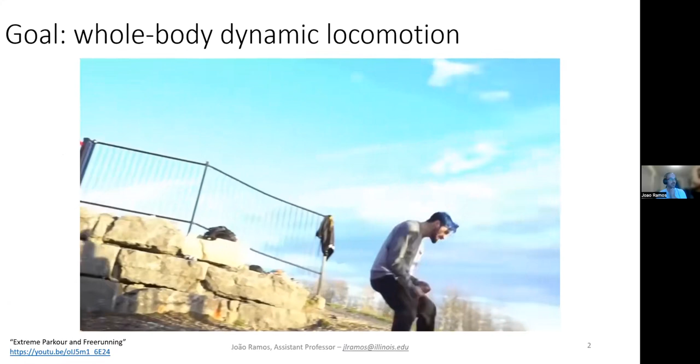Starting at a high level, what I want to achieve is probably what every roboticist wants: robots that are really able to perform dynamic motions at a human level. What I want is for the robot to exploit dynamics and maneuver through an environment in a very dynamic way, like what we see in parkour and free running. The difference is that I don't want to achieve this through complete autonomy on the robot side.

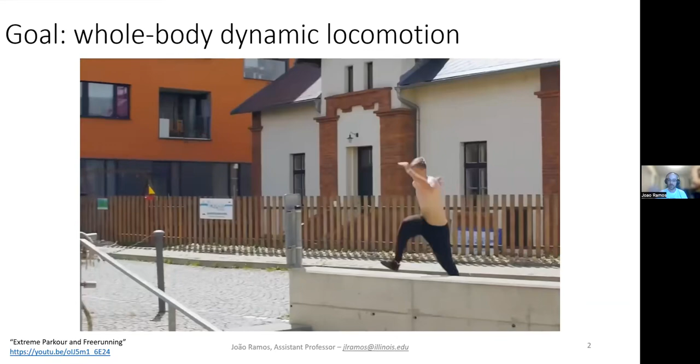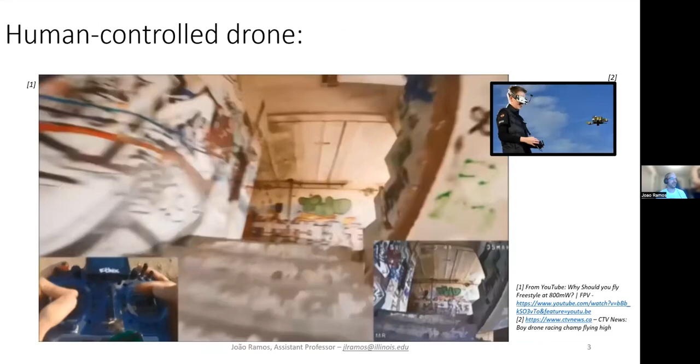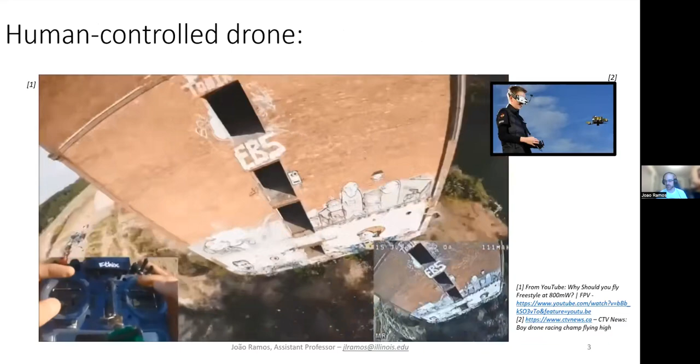What I'm trying to do is achieve this through human control. I would argue that humans are extremely good at controlling things. For example, this is a video of a pilot flying this drone through a very cluttered environment, and I would argue that this performance rivals or surpasses a lot of what autonomous drones can do. Humans have a really good sense of anticipation and maneuverability, and they can build these motor skills. By the way, I love this part, it's really cool.

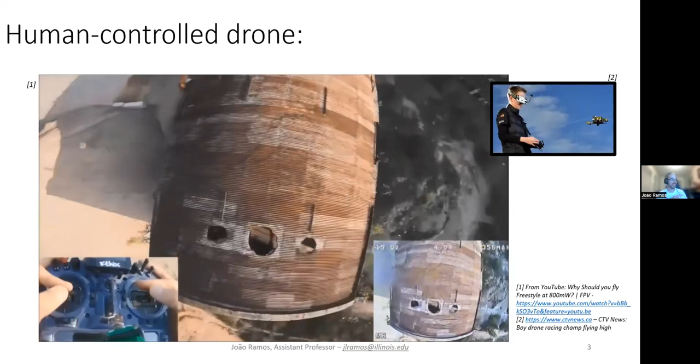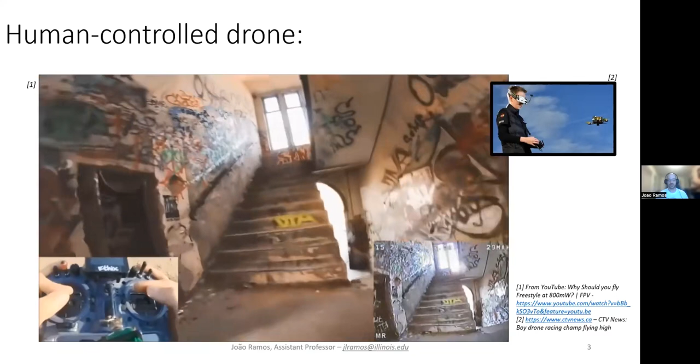So what I'm trying to do is achieve this parkour-level locomotion of robots through human control instead of complete autonomy. The difference, though, is that flying a drone versus maneuvering your body throughout the environment in a terrestrial way is a completely different thing. When you're jumping and running around, you're trying to leverage your contact forces in the environment in order to translate your center of mass.

So you've got to coordinate your whole body, climb and interact with the environment, do fast motions, contact the world with multiple parts of your body, and mitigate impacts. Pretty much what we need is a robot that has human-level adaptation to the environment. I think we're missing a chance to leverage this human innate ability to control their bodies if we're not using it to control humanoid robots as well.

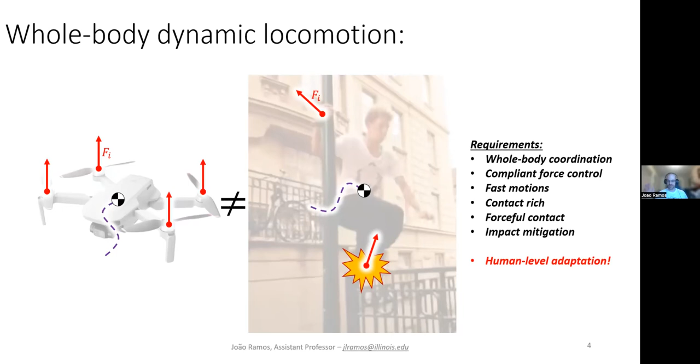So the overarching goal of my lab, the RoboDesign Lab at UIUC, is to accomplish this. The research in my lab is divided into three main topics. The first is something I call controls-aware design: how do you think about the design of these robots, knowing they need to facilitate control, be more efficient, faster, have better inertia distribution, and so on? How do you design when targeting facilitation of controls?

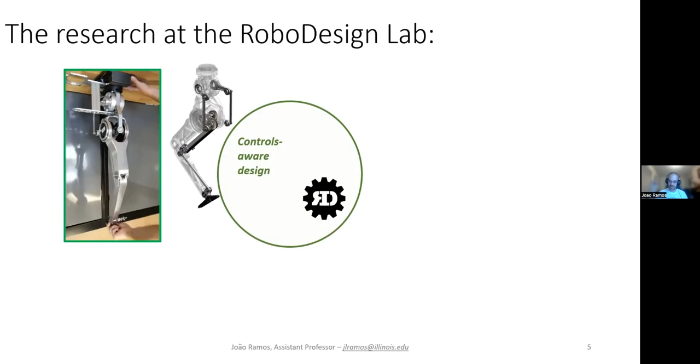The second thing we do is what I call human-centered control. How do you create control architectures for these robots knowing that they're going to be, in the end, controlled by a person? How should the robot follow the person's motion?

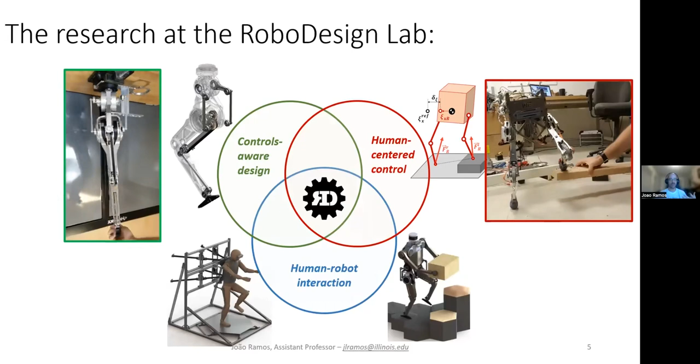How should the robot think about its own contact forces when it's trying to reproduce what the person is doing? And the third topic is putting the two together. So how do you think about human-robot interaction? How should the robot follow what the person is doing, but also provide feedback that enables the operator to understand what is happening, and be able to replan their motion and do a better job.

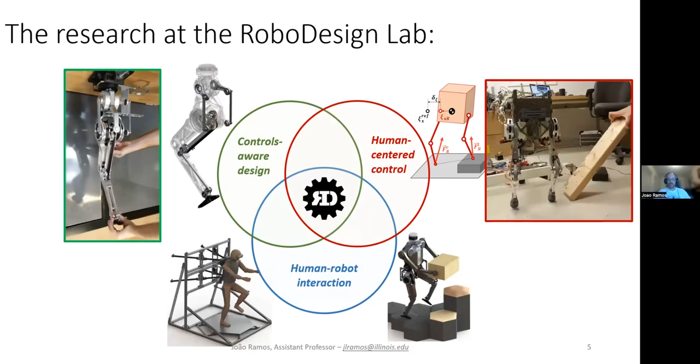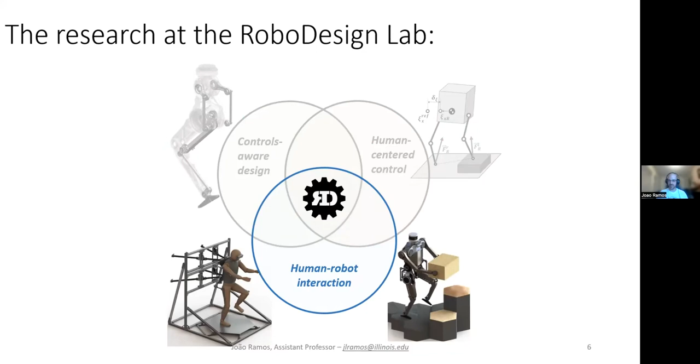I'll give a quick intro on some of the work we've done on human-robot interaction, to give some context to what I'm going to talk about in design. But a lot of what I'll focus on today is controls-aware design, which will be the second, longer half of this time.

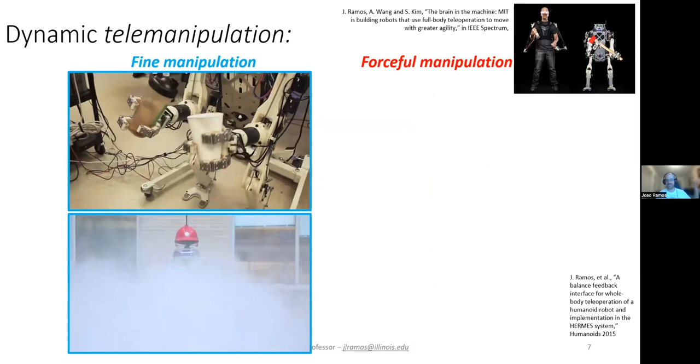My work on manipulation, telemanipulation and teleoperation began some time ago in my PhD. At the time we were doing kind of crazy things, like trying to put out this mock fire using a robot, doing what I call fine manipulations.

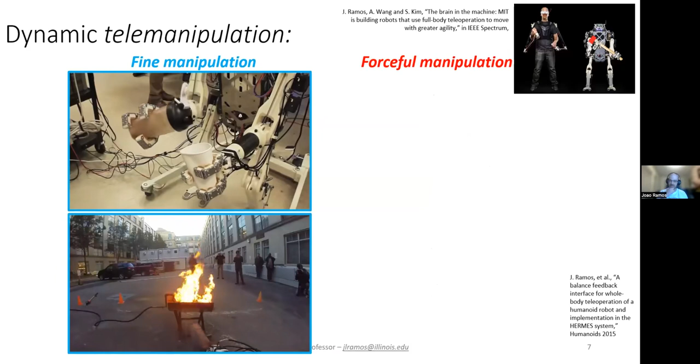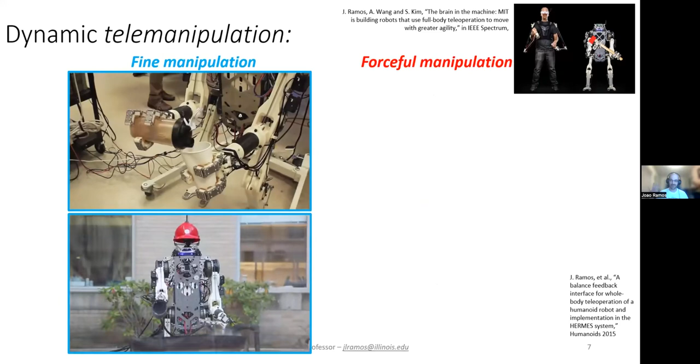What I'd like to point out is that these things were incredibly easy to do in teleoperation. We got it done the first day. It's probably something that would take a month of work to get the robot to do reliably. But at the time, we weren't looking at fine, slow, dexterous manipulation of things.

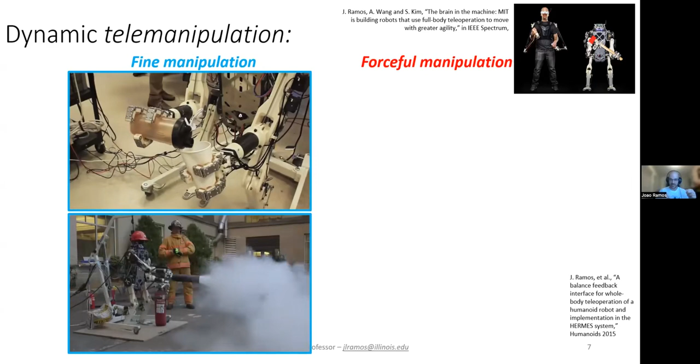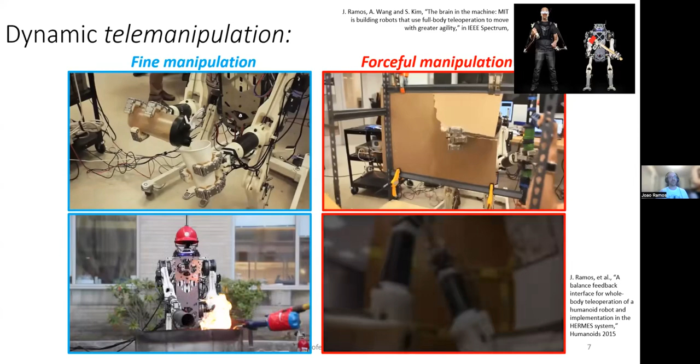What we wanted to do is what we call forceful manipulation. How do you teleoperate a robot to create large forces, impact the environment, deal with that impact, and also provide the person correct force feedback in order to better control the motion of the robot.

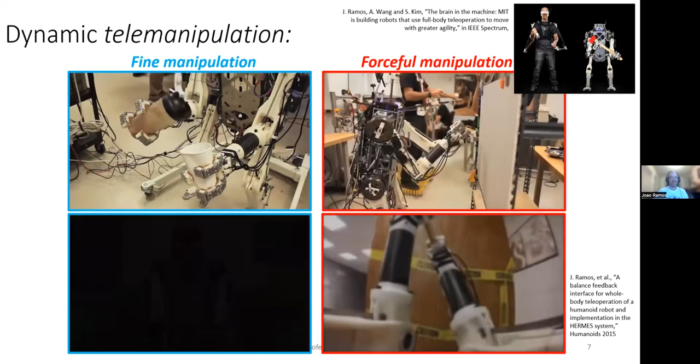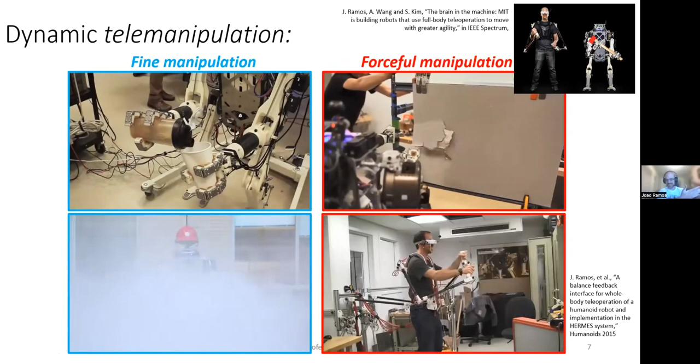And also, of course, if you build a motion capture system and a humanoid robot, I don't see anything better to do than trying to punch things and break walls and stuff like that. So there you go - but this was the very beginning.

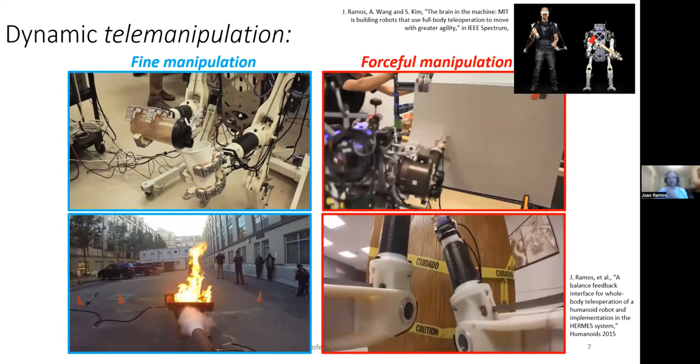At the time, honestly, we didn't know too much about what we were doing. We were just trying to explore what locomotion, what teleoperation would look like. So we went for manipulation.

The next thing I started looking at is what we call dynamic telelocomotion. At the time I was trying to figure out how to capture human motion and in real time convert that motion to a reference that is dynamically consistent for the robot to follow, getting the robot to follow that in real time.

This is probably one of my most important results from my postdoc and PhD. I was able to achieve dynamically stepping that was completely synchronous between the human and the robot. I want to give a shout out to biomechanics here, because a lot of my ideas come from dynamic similarity, and I brought that to robotics - it worked pretty well.

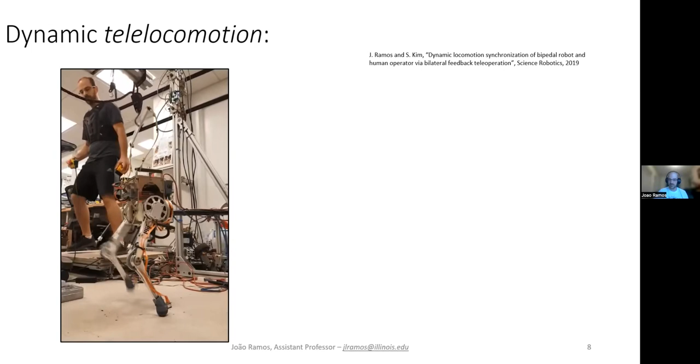At the time I was trying to really explore what we could accomplish with teleoperation of locomotion. So I also got to try these cute little jumps that we demonstrated here. All this is accomplished by simply scaling the forces that the person is trying to produce.

For example, here the operator is on this force plate, and pretty much what I do is capture the force that the person is applying. I tell the robot to apply a dynamically consistent force, and what results is that the robot takes off and jumps just like the person is doing.

What's nice is that we could also leverage a lot of results from autonomous robots as well. For example, if we embed some autonomy on the robot, it can also start to deal with obstacles that aren't present for the person. In the end, if the robot can still perform the motion, the person doesn't need to feel any feedback of what's happening to the robot.

I won't get into all the details of all these things - I just want to talk at a high level about what's happening.

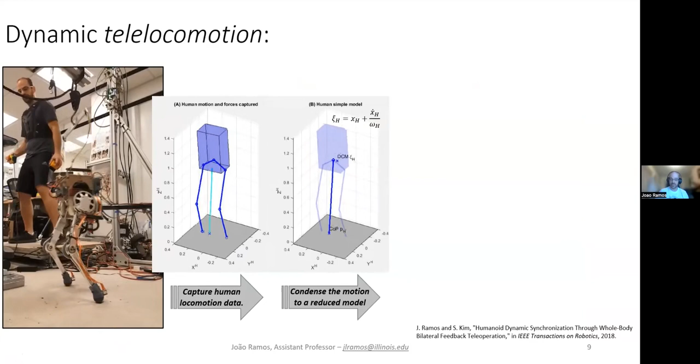We transfer that using dynamic similarity to the robot, so we can scale that motion to the robot. The autonomous controller just needs to figure out how the forces applied on the ground reproduce that reduced order dynamics. In the end, what we want is that the two reduced models, for the person and the robot, the LIP, the linear inverted pendulum, are dynamically similar.

There's a lot more detail that goes into this, but this is the gist of it. If you can use this reduced model as a way to scale the motion, you get the two to move synchronously.

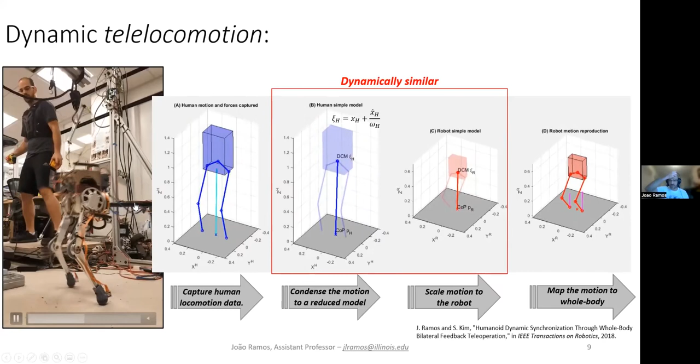More recently, you can see here the robot is constrained to the frontal plane, there's a gantry that holds it in place. At the time, I was just doing frontal plane motion, but recently I was able to show, with my student, dynamic walking in simulation just a few months ago.

So what we're doing now is extending the idea of frontal plane stepping in place to dynamic walking, such that the person can control the robot to walk around. If you walk in place and then lean forward, we can generate a spring using this haptic feedback device, and the person can control the robot to walk forward. You can control the robot's forward speed just by leaning back and forth.

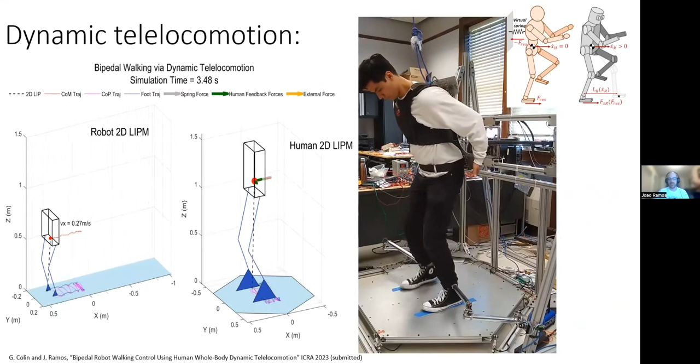What we're working on right now is implementing this on the robot Tello that we've been developing in our lab. In the end, all we're trying to accomplish is dynamic telelocomotion on unstructured terrain by using human input. This is the end goal, this is the dream. Hope to accomplish this in the next few years, but this is the main research we're doing in our lab.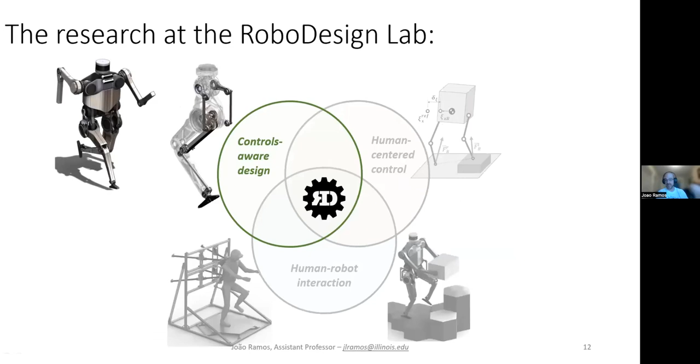What I'd like to focus on today is what I call controls-aware design. I'll talk about some design principles and metrics that we developed specifically for dynamic humanoid robots, in this case the robot Telo that you see here, which is mostly the work of my PhD student Youngwoo Sim.

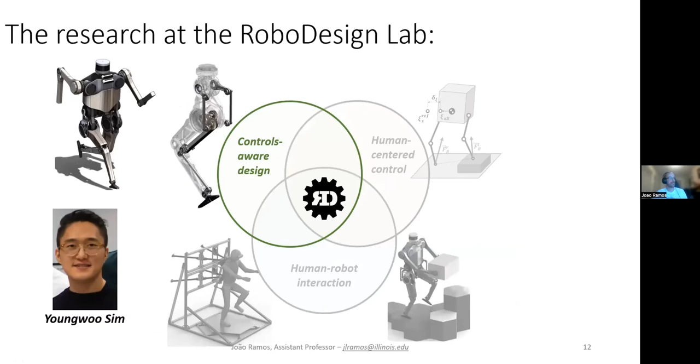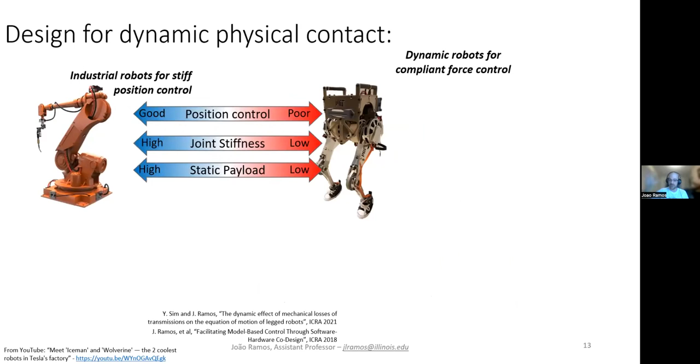What I want to do is really depart from this old paradigm of position control industrial robot manipulators. If you're trying to develop a robot that's actually supposed to interact with the environment, touch the environment, and mitigate impacts and all these things, then you really need to rethink how we control.

From these old factory robots, what we wanted was to be really high precision, really stiff, really high payloads. But if you think about it, this is not what we want from a robot that needs to interact with something that is unknown.

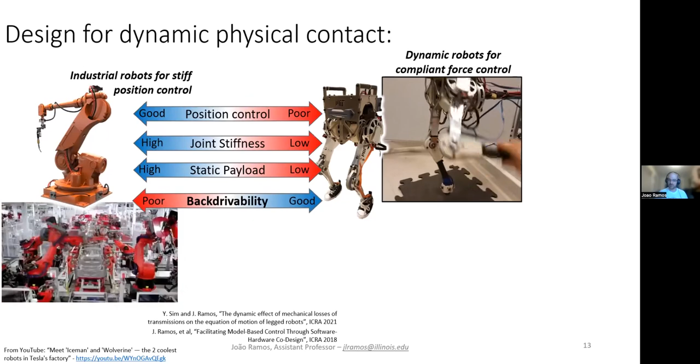What we want is a robot to be incredibly backdrivable. So it's kind of like our arms — if you turn it off, you can move it around everywhere, and we need that transparency.

You also want to have a really high bandwidth for generating high forces. If you step really fast to try to balance yourself, you need to be able to move your legs fast, mitigate impacts fast, and ramp up contact forces fast. So your overall control bandwidth needs to be high.

You also want to be able to mitigate impacts. If you try to jump, you need to absorb that jump when you fall, and you need to do that compliantly without destroying your gearboxes or any other mechanical component.

But I'd say probably one of the most important things is that you need to be able to produce reliable force control. I'm not talking about closed loop force control, I'm talking about real open loop force control — if I command a force from my actuators, I want to get that force, and I want to get it fast.

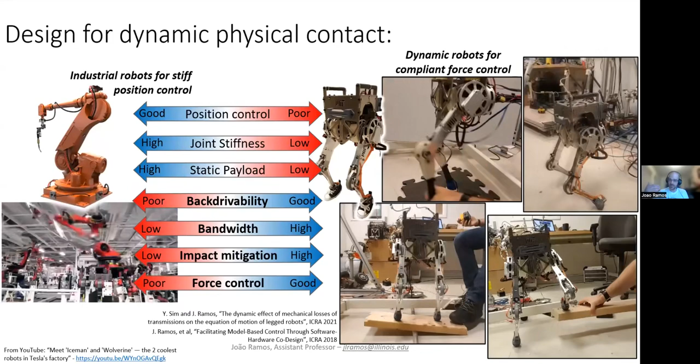I would argue that we really need to rethink how we design these robots and how we think about the performance of these robots—that is completely different from what we used to have. I think a lot of people have started to go in that direction, but I would argue that we're not there yet.

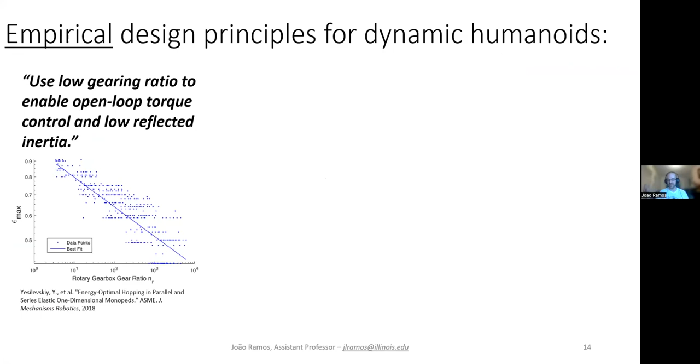Or maybe another one we see a lot is: we use actuators that have a large radius because we want to increase the torque density. Okay, but how much is too much? Or how much should we go? What is the biggest actuator that can fit? How do you think about these things?

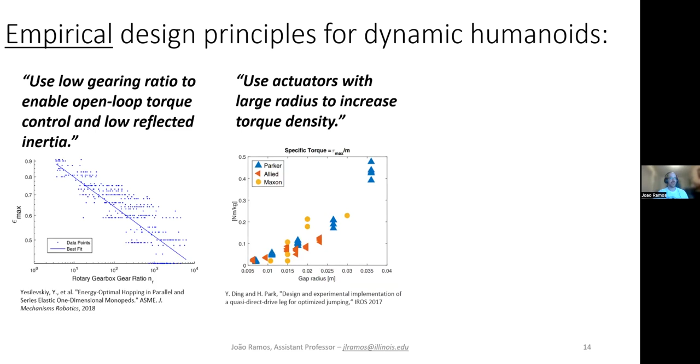Then one that I see a lot, and it was bothering me for the longest time, is when you see something like: we place the actuator near the body to reduce the moving inertia of the leg. Okay, but how much is good enough? Should I do very complicated mechanisms so I can put all the actuators near the body? Or could I tolerate some actuators being more distal, hurting the inertia of the leg a bit, but gaining something else?

So pretty much what I'm trying to do is, can we be more systematic about thinking about this, instead of just empirically saying 'oh, I want to achieve this.' I want to be able to quantify how much I get if I introduce this design, what the trade-offs are, and quantify what those design trade-offs are. So this is what I'm trying to do.

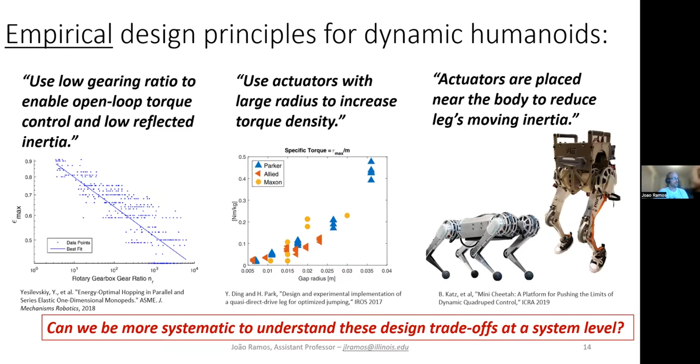These things are very clear for old manipulators, for example, and things of that sort. But there's nothing like this that exists for humanoid robots—no recipe or book that tells you how to design a humanoid robot. So what I want to do is go in that direction. Today I'll talk about three of these design principles, and the first one, which I think is very important, is backdrivability.

A lot of times when you grab an electric motor and try to move it—grab the output and try to move the motor—we see there's a relationship between the gearing ratio and how easy it feels to move that. But we don't know exactly what that is. We don't have a good way to quantify this at a robot level. So backdrivability, the way I see it, comes from a fundamental issue with the geometry of gearboxes.

If you look at the geometry of a gearbox, I can condense that to a one-dimensional problem. Forward driving, meaning the motor drives the output, is equivalent to pushing with this blue force U to move this big mass M, which is a load. Backward driving, where you grab the output and back-drive the motor, is the other way around: I apply a force X and try to move the mass of the motor, little m. The slope of this ramp is equivalent to your mechanical advantage.

I won't go into the details, but if you write the equation of motion of this system, it looks something like this. Depending on whether you're moving forward—driving the output using the motor—or the output is driving the motor through the gearbox, you have a different equation of motion, because your friction now changes direction.

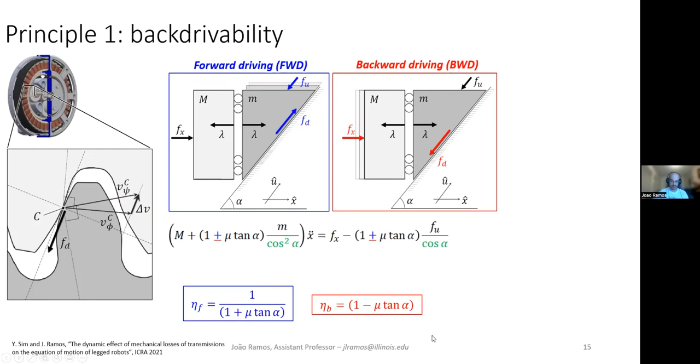So if you compute the efficiency, that means the forward efficiency is different from the backwards efficiency, which means the power flow in the system is different. However, what I want to point out, and the key thing I'm trying to get here, is that it's always the case that the forward efficiency is higher than the backwards efficiency. And there's a point where, for example, at 50% forward efficiency of your transmission, you're completely non-backdrivable.

This is equivalent to, for example, if you have a robot manipulator and you try to move it, it's a complete statue, right? So it's zero backwards efficiency. And this is always the case.

The other thing I want to point out is that the efficiency of your transmission is also a factor of apparent mass. So basically, the worse the efficiency of your transmission, the heavier and higher the reflected inertia of a manipulator, the less backdrivable it is, and the worse it is to absorb impacts.

So what we're trying to do is actually quantify this at a robot level. If you think about the directional efficiency at a robot level, for example the entire leg of the robot, how does that go?

I won't go through all the details, but the high level idea here is that we start with the redundant system, which considers the angle of the motors and the angle of the joints. And then we use the notion of directional efficiency in order to reduce to the minimal system.

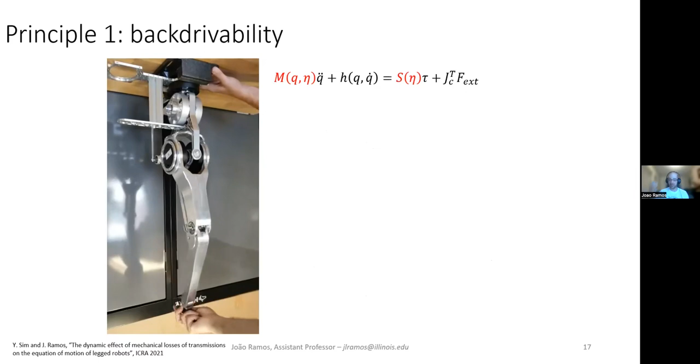What I want to be able to do is, a priori, before I build my humanoid, compute whether a joint being backdrivable or not is going to affect the robot's performance. And this is what we get to do with this modeling that we're trying to perform.

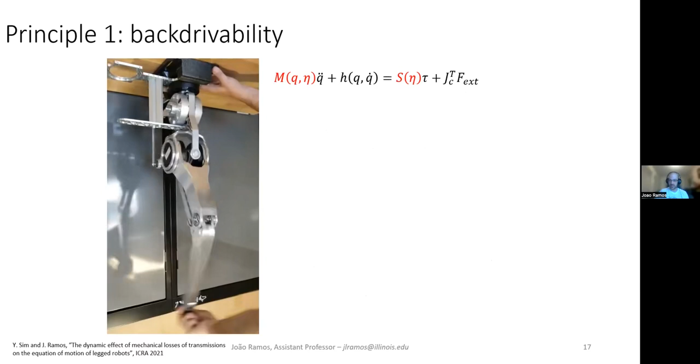Just so you have an idea, this is the computation of the reflected inertia, depending on what kind of friction model you assume. For example, if the robot is completely frictionless, then you get the black ellipsoid, which shows how much inertia you feel if you move the foot around.

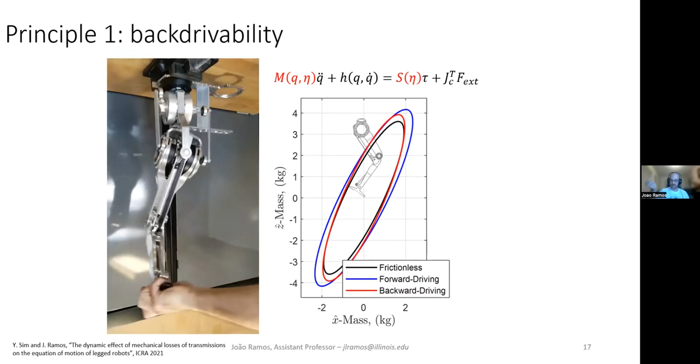Now, if you have imperfect gearboxes, which maybe have 80% efficiency, that inertia is going to feel larger. At some point, the inertia is going to be so big that it's as if the foot has infinite inertia. So what I want to do is quantify how much that is.

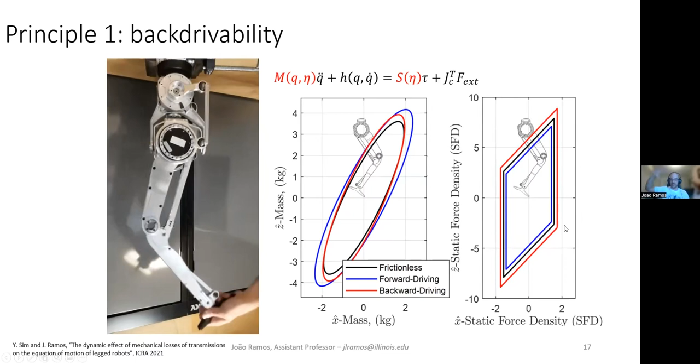And the other way around also works. If the robot has imperfect transmissions, it also affects the ability to produce force. So your force capability polytope is going to be shifted around depending on the transmission efficiency. This is our effort to try to quantify what backdrivability means in a way that can help design things a priori.

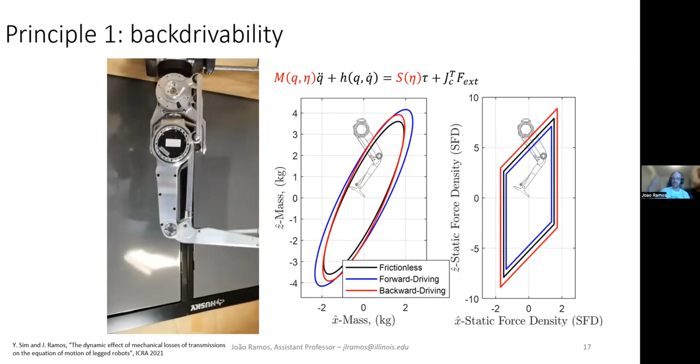The second thing I wanted to talk about is what we call centroidal inertia isotropy. This idea came from a really iconic paper from Goswami that talks about inertia shape. So basically the key idea means...

Depending on the pose of the robot, the whole inertia of the robot is going to vary. So maybe if the robot is standing like this, the centroidal inertia looks like that, or if I'm doing something like this, it will look more like a sphere. My point is, if you imagine your limbs are completely massless, it doesn't matter how you pose them in space, the inertia will always be the same.

So this is a way we thought about quantifying how close to the body you should be placing actuators. If you place your actuators very far from your body and you're trying to pose everywhere, your inertia shape is going to vary a lot.

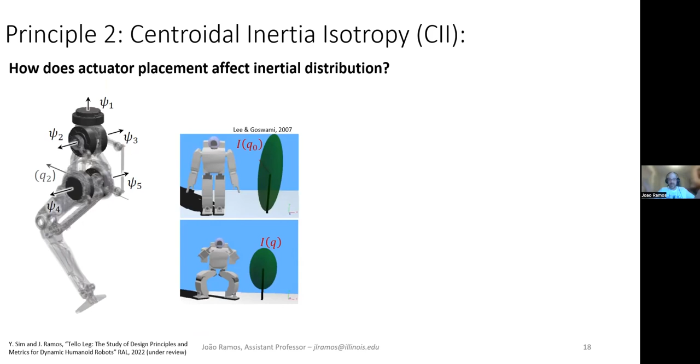But if your actuators are close to the body and you move everywhere, your inertia will not vary too much. So the CII is a way to quantify the distribution of inertia depending on how you pose your body. It's given by the ratio between occurring inertia and some nominal inertia, maybe the robot just standing around, and you get a distribution that depends on configuration.

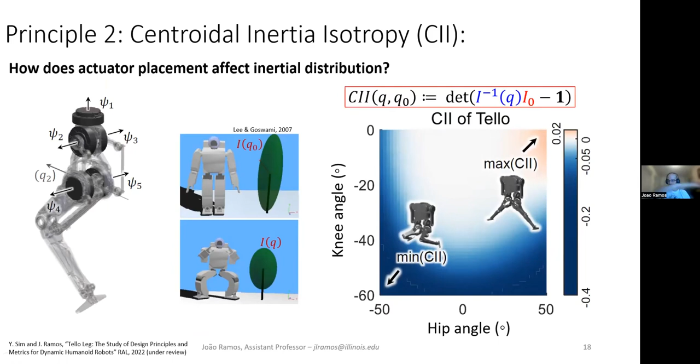For different poses of the body, you get a different value of the CII. And what we want is for the CII to be completely flat, the same everywhere on the configuration space.

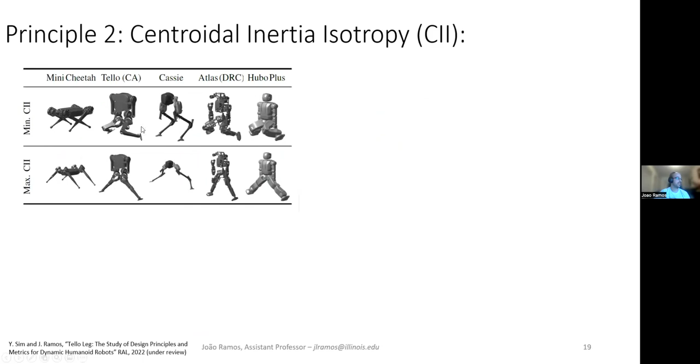So what we did is quantify this for a bunch of robots, for example Mini Cheetah, Tello (our robot), Cassie, DRC Atlas, and Hubo. What we get is a set of curves, a multidimensional curve that depends on the configuration of the robot. You see that Cassie is a lot better than Hubo - Hubo completely varies its inertia whatever position it poses, but Cassie has a much flatter inertia distribution, which is something we always try to design for.

Something we try to quantify is the difference between the maximum inertia and the smallest inertia, and this varies dramatically depending on how dynamic your robot is. Quadrupedal robots with massless legs have very good numbers here, very small. For humanoid robots with proximal actuation, meaning actuators close to the body, the numbers are modest - that's the Tello robot or Cassie, the ones we're designing for.

And robots with co-located actuation, meaning motors at the joints, have a very, very bad inertia distribution. That means when they move around, they're swinging a lot of mass, which is something you don't want. So in the end, what we want to do is compute the distribution of inertia so we can get a number for how good or bad it is for a given design of the robot.

And what we saw is that robots that tend to be more dynamic usually have a better inertia distribution, something we backwards checked afterwards.

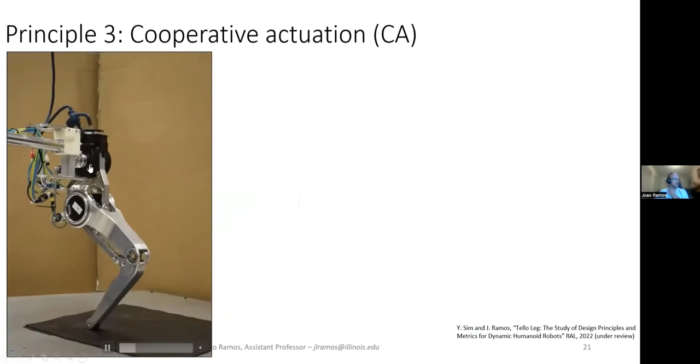So this was a cute little jump we did with a humanoid robot. What we're trying to show is that for this jump, which mostly requires knee torque and very little ankle torque - in fact there's no ankle here - we produce 20 Newton meters at the joint level but only require 10 Newton meters at the motor level, and only 30% more speed.

So what I want to say is that if you have motions that require a lot of one joint but not a lot of another joint, maybe it's a good idea to combine the actuators for those two joints.

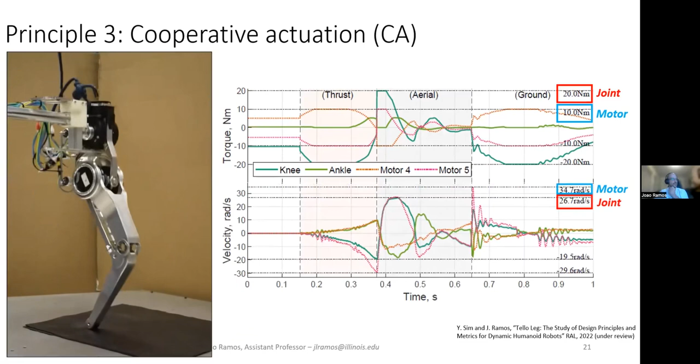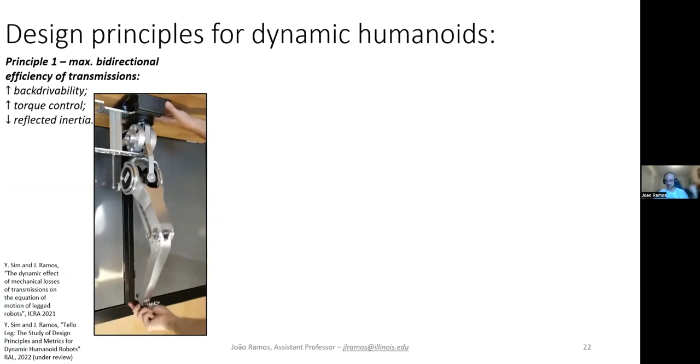Okay, so there's a lot more design principles, but the ones that I wanted to cover today, maybe the most important ones, are: first, maximize the efficiency of your transmission. That improves backdrivability, your torque control capability, and improves your reflected inertia. You also want to maximize your CII, your inertial distribution, which reduces your limb inertia and makes your centroidal inertia more constant, which is very good for controls.

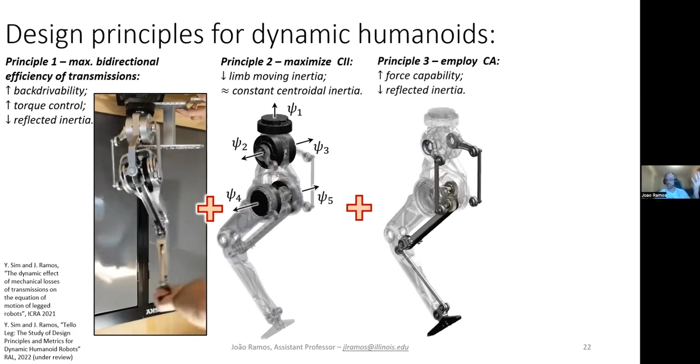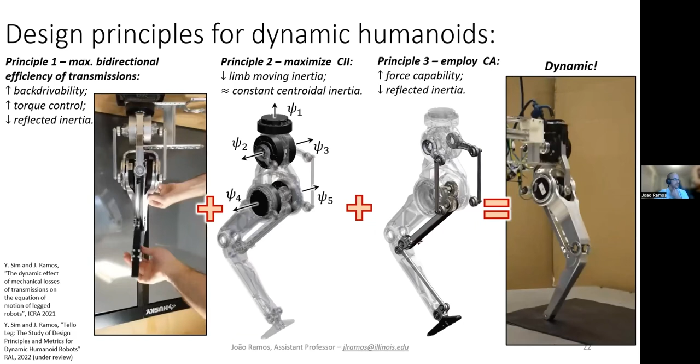The third one is you want to employ cooperative actuation. Maybe you want to combine motors with some joints because that will allow you to have more force capability without inflating too much your reflected inertia. If you can make all these things work together, then you can probably get to robots that are acting more dynamically.

The last thing I want to mention: I'm very glad that I'm leading a team, a multi-university team, that has just been awarded 1.2 million from NSF. What we're trying to do is design an open source dynamic humanoid robot called Dash. That's going to be super cool. So what we're trying to do is design a robot that has capabilities that go from sprint running, powerlifting, and loaded carry.

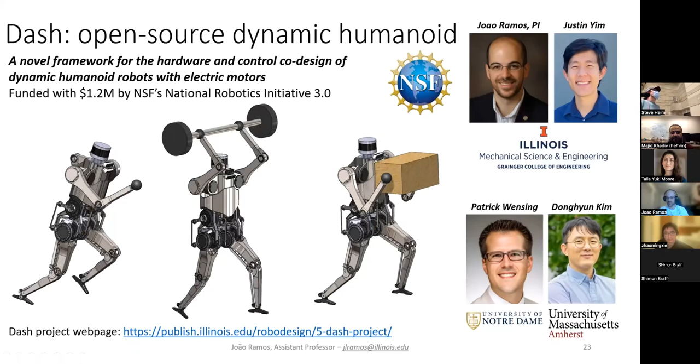What we're trying to do is design a holistic framework that thinks about the design of the robot and controls at the same time. The project just started last month, so we don't have a lot to show yet, but here's a web page, please keep tuned. I'm very excited about this initiative, and I think it's going to be great, and I hope a lot of people will get to build their own Dashes.

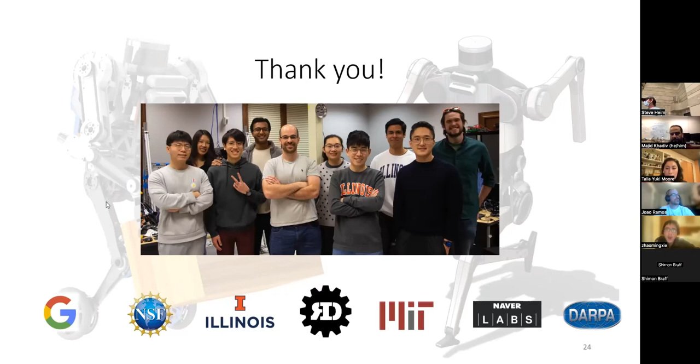My name is Guoping, and I'm a postdoc doing biomechanics in locomotion, focused more on bipedal locomotion and also axial control. So the first question is related to teleoperation. It's quite interesting to see that by only applying some sort of bidirectional feedback in the foot placement and also the trunk between the robot and the human, you can achieve such good results. I'm wondering, would it be better or worse if you also introduce bidirectional communication between different links or joints? It would be similar to, like, if you have a lower limb exoskeleton, then basically you will have more interactions.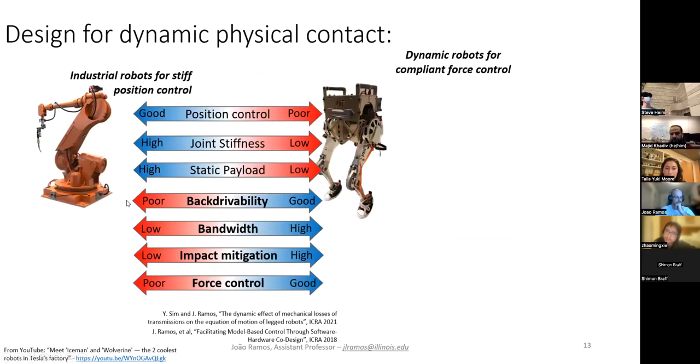Yeah, so this is a great question, something I've been thinking about for a long time. The whole point is that locomotion, and eventually mobile manipulation, requires coordination of the entire body. I need to coordinate where I'm placing my feet, what kind of forces I'm generating, what my arms are doing. In the end, the amount of feedback you give to a person can be too much. It's just too many things to pay attention to at the same time. So what we're trying to do here is actually try to reduce that.

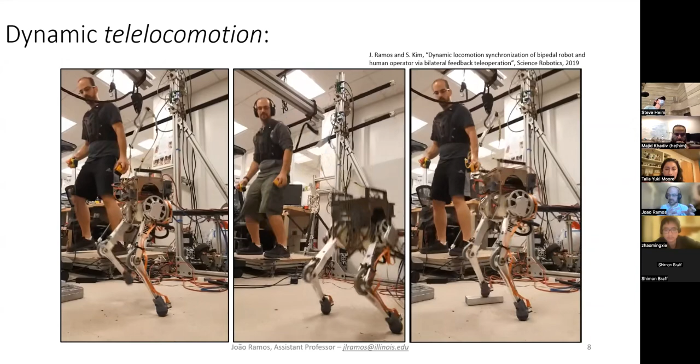So instead of, for example, giving force feedback to their hands and their feet and their body, what I'm trying to do is provide a single force feedback to their center of mass, which is kind of the net wrench of all the forces applied to the robot. I'm trying to give the person a condensed summary of all the forces applied to the robot, to reduce the cognitive load associated with driving the robot. A lot of this has to do with how autonomous robots are controlled.

In the end of the day, what we think about is our wrenches applied to the center of mass of the robot. So what I'm trying to do is leverage that idea and use it as feedback as well. I would like to add feedback to hands and feet, but the issue is the amount of feedback we want is on the order of 150 to 200 newtons. If you try to build a device that can do that, its reflected inertia is usually very high, so it ends up being a lot of effort for the person to move so many things around. So instead I try to condense that into a single force, which in this case is these two rods applied to the person's back. Did I answer your question?

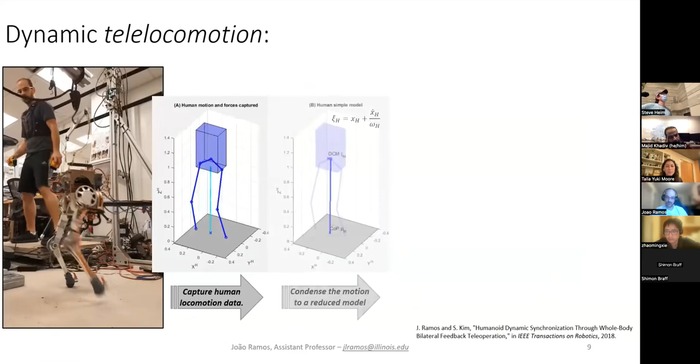Okay, great, thanks. And the second question would be more related to the backdrivability for your calculations. Does it only apply for the gearbox, like the planetary gearbox, or is it more general purpose? Because I thought it might be different if you have a belt reduction system or some other transmission system, right?

Yeah, so it's highly dependent on the transmission. In this case, I'm just showing it for spur gears, for example spur gear or planetary reductions. However, it is almost always the case that whatever transmission you use has directional efficiency. So if you drive one way versus the other way, it's a different efficiency. For example, belts are almost the same in both directions.

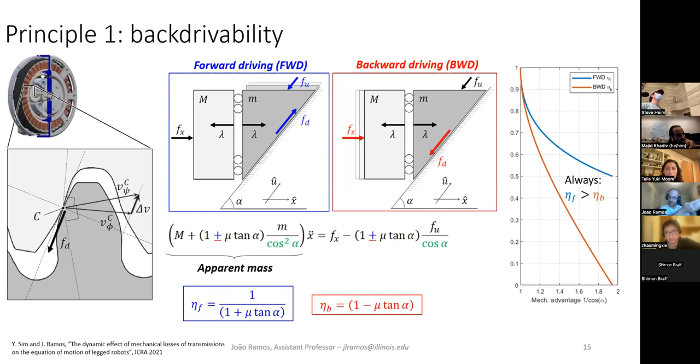But for example, harmonic drives are very different. The proof of that is if you try to back drive a harmonic drive, it feels incredibly difficult, right? That means the backwards efficiency is very low. The model to calculate that efficiency will be different from what I'm showing here, but it's almost always the case that forward and backward efficiency are different. So as long as you can quantify this, the forward and backwards efficiency, that's what we want from the model. You can even measure it experimentally if you don't have a model for it.

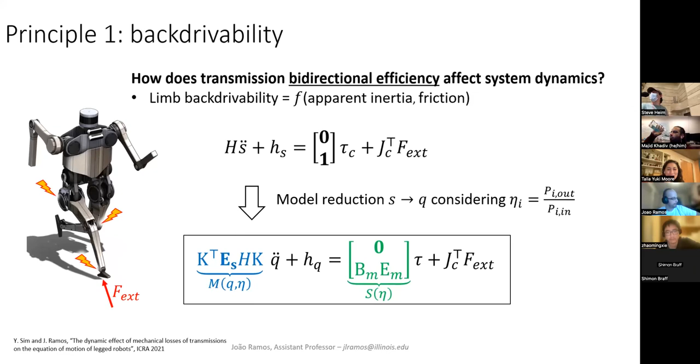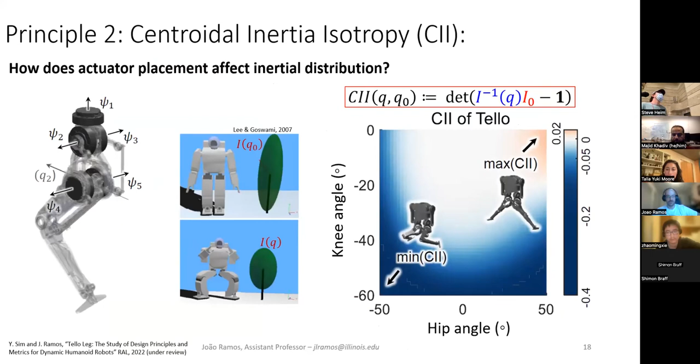Yeah, right. And the third question is related to leg mass or leg inertia. At the beginning, you showed a video of humans doing parkour, jumping and flipping. For humans, the leg mass inertia is like 15 to 20% of the whole body. But in your conclusions, it seems that having as little leg mass or leg inertia as possible gives you the most agile dynamic locomotion, but that's actually not the case for humans, right? So do you have a comment on that?

It is always a design metric, right? For example, if you want to stand and I push you, you react with your body like this. So if your arms are massless, you cannot react to disturbance like this. So having massive limbs is sometimes beneficial. Some animals use tails as reaction masses.

However, what I'm saying is that this is a way you can quantify that. In a lot of controllers for humanoid robots, the controller thinks of the robot as centroidal dynamics, or a single rigid body. In that case, it is beneficial to have a very flat inertial distribution. But if you're trying to use a robot that leverages its body to perform a task, in that case you do want a non-even inertial distribution. So what I'm trying to provide here is a tool to quantify this. I'm not saying it's always the case that you want it flat, but here's a tool to quantify how flat it is, and whether that fits what you're trying to do with your robot. Great, thanks a lot.

Thanks for your questions, it was great. We have another question here. Give me one.

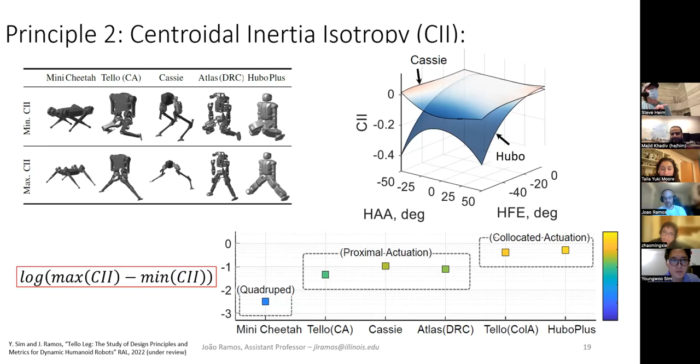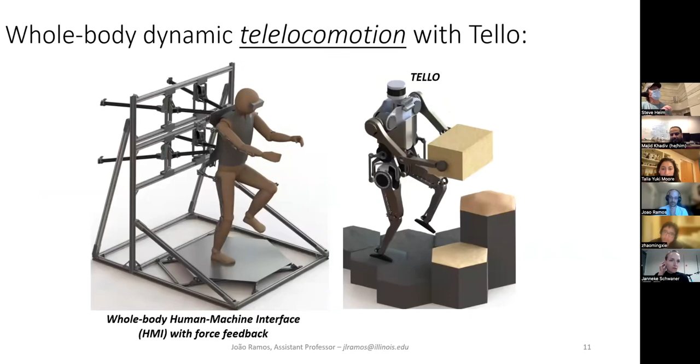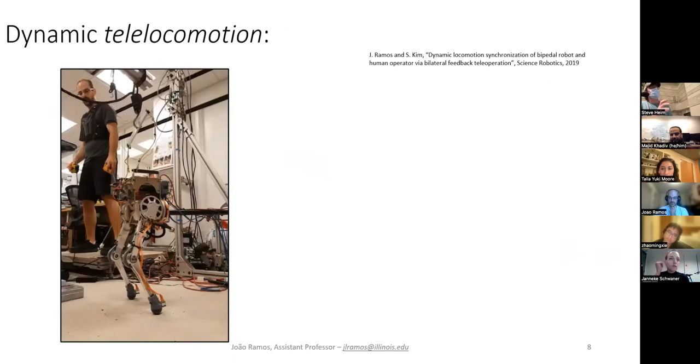I have a question about your teleoperation. You mentioned, in answer to Zhaoming's question, that you try to use a very minimal set of quantities for feedback to the user. What about in the other direction? I imagine the user can actually command things that the robot might not be able to track. Is there a single quantity that you can monitor to see, oh, you're not going to be able to do this safely, don't even try tracking it?

Yeah, so pretty much the philosophy of what I'm trying to do here is that the robot's performance is only going to be as good as the reduced model that you're trying to use. So if you just have an LIP model but you're trying to get the robot to run, it would probably not be a very good idea. So you need to build a model that is able to capture the dynamics of what you're trying to do with the robot.

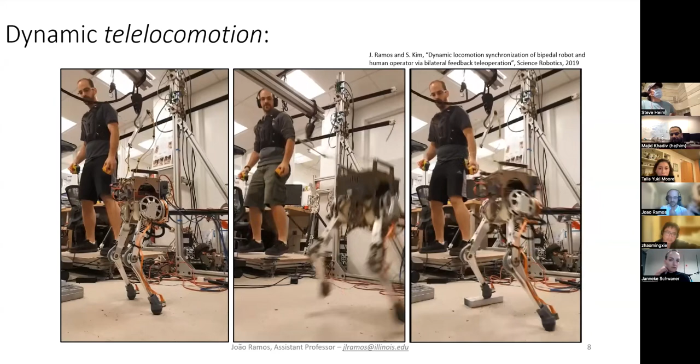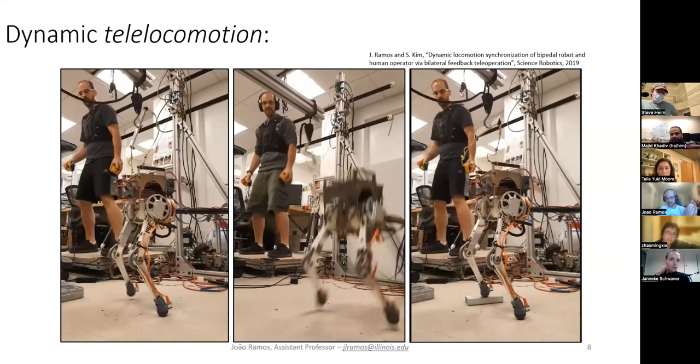So in that sense, I think the same notions that we have from autonomous robots apply here. If we have a certain model and a robot with certain dynamics, can the model produce the motion that we're trying to do with that robot? If yes, then I should be able to teleoperate using what I'm showing. If no, then the teleoperation will not work. It's a hard answer just because I don't know how to quantify stability in locomotion. But it's pretty much: if your reduced model can do it, then this teleoperation should be able to demonstrate that.